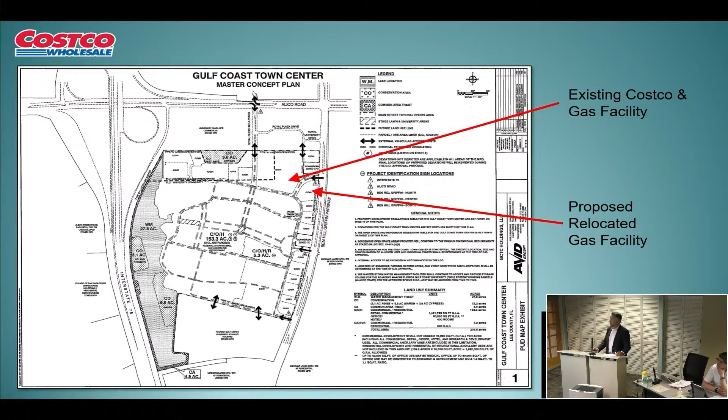This is the Gulf Coast Town Center site plan, and it shows where the existing gas facility is and the proposed relocated gas facility.

This is the PUD exhibit, so it shows in context with the out parcel redevelopment, the new staging of the vehicles and the canopy, the entry point that we talked about, and then the need for a separation distance from the intersection, as well as the separation distance from the Taco Bell parcel. But as you see, the interconnection points will remain into Taco Bell, and there will be dedicated circulation internally for the vehicles.

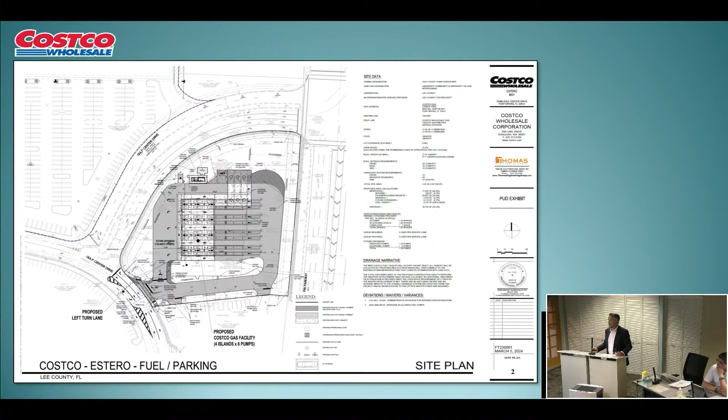The next slide shows a closer up image of that with the site data. This was all supplied, but I wanted to provide something zoomed in so we could see it if we need to go back to it for discussion purposes.

But you see the main entry point here. This is one of the deviations we need, which is a separation distance from the intersection and a separation distance from the Taco Bell parcel. But the two interconnection points will remain. They've already been programmed, and you see the circulation.

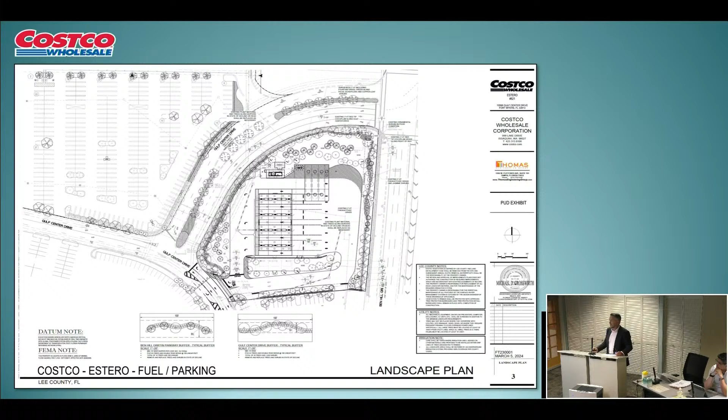This is our landscape plan. What we're doing is supplementing the existing landscaping that's around the perimeter that was installed with the development of Gulf Coast Town Center. It's very mature, very robust. We're going to be adding to that on the property in various areas throughout, where we've added landscaping per the landscape code and plan, and this has been deemed sufficient by staff.

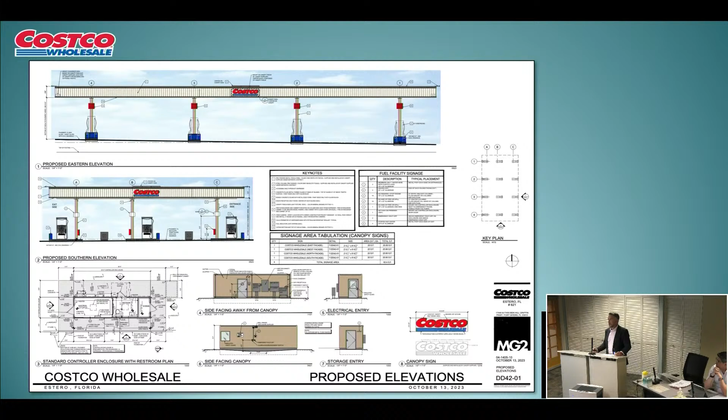And then there is the elevation imagery of the canopy itself. One thing to note about this facility again, I'll reiterate, there is no convenience store with this. There is no automobile service abilities for gas and oil and tire change. It is strictly a fueling facility, and it is tied to the hours of operation of the existing Costco wholesale store, so it won't operate as a satellite. It will remain as an ancillary use to the primary use, which is Costco wholesale.

And with that, thank you very much. Me and my team are available to answer any questions.

So can you go back to the site plan for a moment for the actual site? Yes. So the future expansion, because you're requesting 30 fueling stations. That's correct, fueling positions, which currently is 8 pumps with 16 fueling positions.

That's one of my questions, because the TIS mentioned that you've currently got 8 pumps, 16 fueling positions. You're changing to 15 pumps, 30 fueling positions, but the request is written as you're increasing from 8 to 30.

30 overall is the request. Yes, ma'am. And here it is in graphic form.

This is the 24 pumps that will be built immediately under the canopy, and then here is the addition of pumps in the future. We've already designed this to allow that expansion as needed per code, and it meets all circulation requirements. The immediate need is 24, but in the future we have the ability to apply for site and engineering plan approval as a future phase expansion per demand. So there's 24 now, and it'd be an additional 6 in the future, determined by demand.

Okay, so those would not be constructed, but you would have whatever infrastructure in place to accommodate that. There would be a grassed landscape island right here until there is a need for expansion into additional fueling. Thank you for that, because where future expansion was written, I thought they were going to be going that way, which would affect us. No, it's going to run the length of this canopy here and extend out.

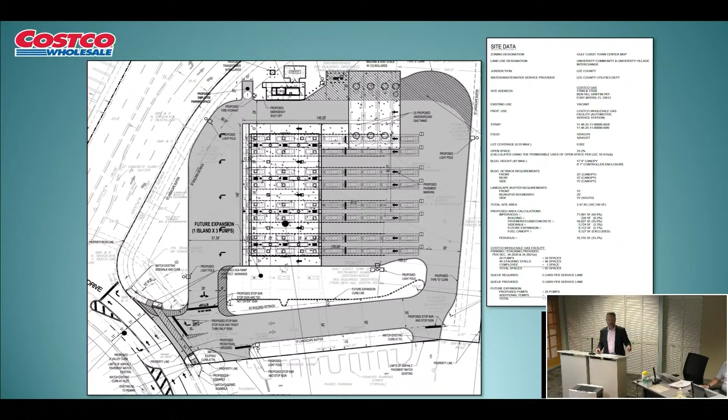That's a great point. We don't intend to operate both, but I will let John Alvarado with Costco speak. You can come up to the microphone. Hey, how are you? For the record, John Alvarado with Costco Wholesale.

So we've done this in different locations. Actually, the three of us worked on another one in Altamonte Springs. Normally what we do is operate the existing one until the other one is completely ready to function, and then we shut down one and open the other one. So there won't be an overlap of having two fuel facilities at the same time.

I want to clarify, it depends on the time of year. If, for example, we finish building it closer to the holidays, we're going to use the new one and close the other one, but we won't demolish it at that point because it's our busiest time of year. And then we don't want to put our employees through the stress of dealing with construction during the holidays.

But it will be completely blocked off, so no use. What would be otherwise the expected time between demolition of the old facility to ensure there's no issue? Also, people are going to be used to going to the old one. There's going to be some confusion, I would imagine, at some point while one's under construction, especially once it looks finished, and then the old one.

I want to be sure that whatever signage or whatever you're doing—if we need conditions here to ensure that's done, or if you need to demolish within a certain period—I don't know if that's been discussed.

Okay, that's more like the construction scheduling, and it depends. We have a blackout period, we call it, from November 1st to January 1st. So in that period of time, we try not to do any work on our properties.

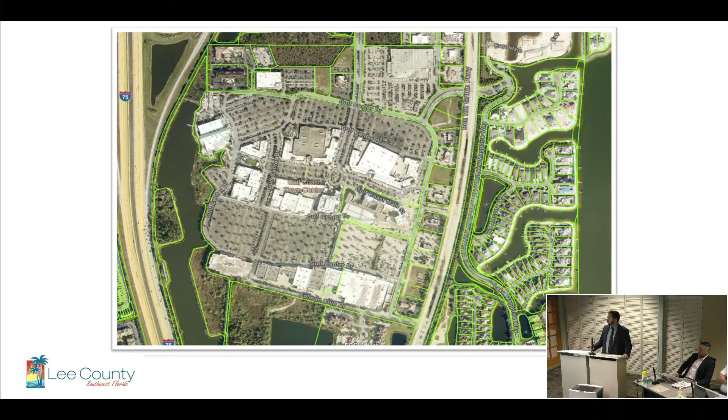Just to put a little more on the record, this is part of the Gulf Coast Town Center MPD. It's quite a significant plan development. Within Lee County, it is a DRI as well. In terms of its location, it's up here in the northeast corner, adjacent to the Costco, across the street from Gulf Center Drive.

The applicant did note that this is really just moving across the street, and I've already put on the record that what's happened is this was an ancillary use, but with its moving across the street and away from the subject property, it's no longer technically an ancillary use, even though its function will be that way. It is a standalone automotive service station. The distinction between that and a convenience food and beverage store, which is what we see most of today, is the lack of a retail component. I can't go buy chips and a soda at this location, I can only buy fuel. That's the big distinction between an automotive service station and a convenience food and beverage store, but that is the correct use classification. That's our opinion, yes.

I don't have it here, but just to talk about the site plan a little bit, there is an existing 25-foot buffer along the property line here, and I believe it's 15 along the north side. I'm not entirely sure of the existing condition of the plantings there today, but with the space that was available and the requirements of 34-1353, it's staff's opinion that the space is available for them to comply with those requirements at time of development order, and that's why we didn't jump in and try to provide additional conditioning on the landscaping plan.

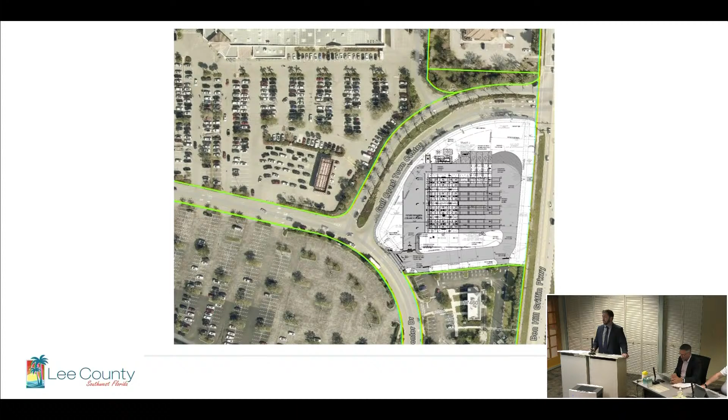This was originally rezoned back in 2000 with Z00024. The most recent governing resolution is Z2020-020 for the record. And there was an administrative approval in 2021 to address some changes with the multifamily tract interior to Gulf Coast Town Center.

Moving forward, I want to talk briefly on decision-making criteria. The applicant went through in their request statement and addressed the criteria as required by the Land Development Code for rezonings and for the plan development amendment criteria. We find that this is a relatively small piece of Gulf Coast Town Center, not a very significant change overall. It really is a relocation of an existing use, and it's our opinion that what the applicant put on the record about this being part of an existing members-only club, the Costco gas facility, means it wouldn't significantly change the amount of trips compared to something like a Wawa or a RaceTrac if constructed there.

This is in the university community future land use category, which has been established to augment Florida Gulf Coast University and provide cohesive development with it. There's a lot of word spaghetti with Florida Gulf Coast University and Gulf Coast Town Center, but we find that this is just working on a single out parcel and not significantly changing the already functioning Gulf Coast Town Center, and what they're doing does not run afoul of the goals, objectives, and policies of Goal 15.

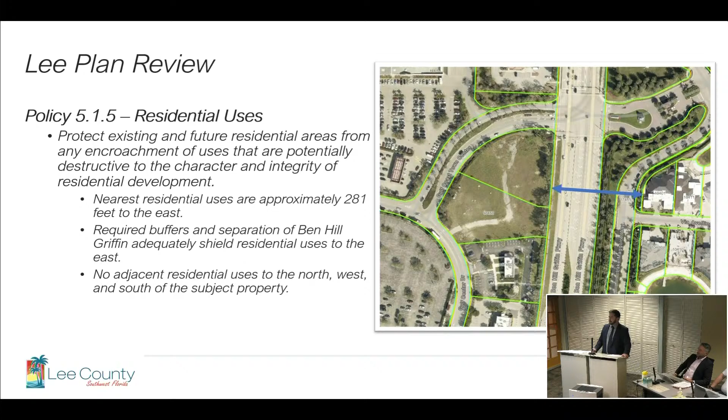Even though we aren't necessarily relying on their landscaping on their end, we do find with the separation and the existing landscaping on our end that there is a substantial separation and buffer today that would ensure minimal impacts from the facility. There are no adjacent residential uses to the north, west, and south. A little further south and west you run into the apartment complex. I'm not sure if that's open yet, but last time I was down there it was still under construction.

Staff reviewed the case through Goal 6, and those requirements will be reviewed again at time of development order approval. I did want to talk about that a little more. You asked about this one gas station being in effect at a time. Oftentimes when things are being replaced on a property, there's an ability for a development order to be stipulated where you get a CO for a property for a gas station, and then there's a stipulation that basically says within 90 days or within 6 months the other facility needs to be demolished. My suspicion is that's how that would play out at time of development order to ensure compliance with the requirements of the zoning resolution.

This isn't a mixed-use development area, but the planned development itself is a mixed-use planned development. Because this isn't really incorporating a true new use, there wasn't a lot of changes to the review for Goal 11, but we do find it meets the consistency of that goal as well.

There is an existing surface water management plan and approved DRI for this property. That may need to be reviewed at time of development order, but they will be required to be consistent with that and tie into the existing infrastructure for Gulf Coast Town Center.

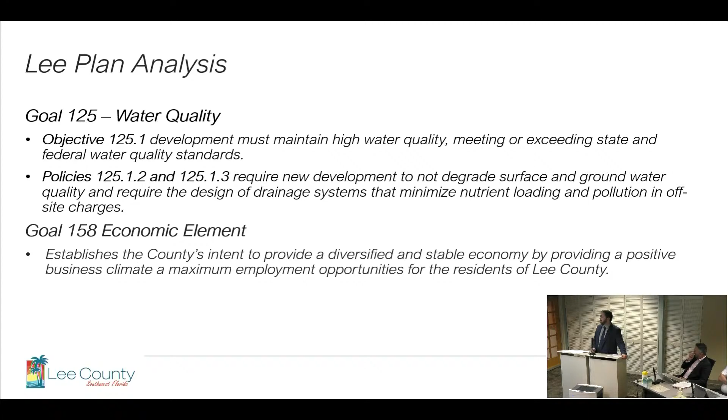I just wanted to put on the record about the deviation. Deviation 24, that's 72 feet versus I believe 93 feet in the staff report. We don't find that to be a significant change, and we're still recommending approval of that deviation.

With that, we're here for any questions you may have. We are recommending approval. I think I asked my questions fully as we went through, but we will come back after rebuttal, I'm sure, and address anything else we need to.

Thank you. Okay, so with that, we will open the public comment period. So the first card I have is for Neil Montgomery.

Good morning, Neil Montgomery for the record, Pavese Law Firm, and Mr. Morrow, our expert witness, is here with us. Just by way of background, I am familiar with both of these projects. I did the DRI for Gulf Coast Town Center, and I did the DRI for Miramar, and I've done most of the amendments to Gulf Coast Town Center.

With that, I would point out that Brad did not ask for a deviation from lighting. There is an existing deviation that allows 30-foot poles, and obviously Miramar is an existing residential community.

I do want to point something out. Having worked on most of the projects within the university community, there is a requirement in the Lee Plan that they're supposed to have it reviewed and commented on by the university. Originally the language said by the Board of Regents, but over time they got rid of that. So originally it was Charlie Reed, then Joe Shepard, then Steve McGarrah, and now it's Kitty Green. We've gone to meet with them on every change for the ones we've done. I don't know that I saw it in the record that they did that, and that is a requirement of the Lee Plan.

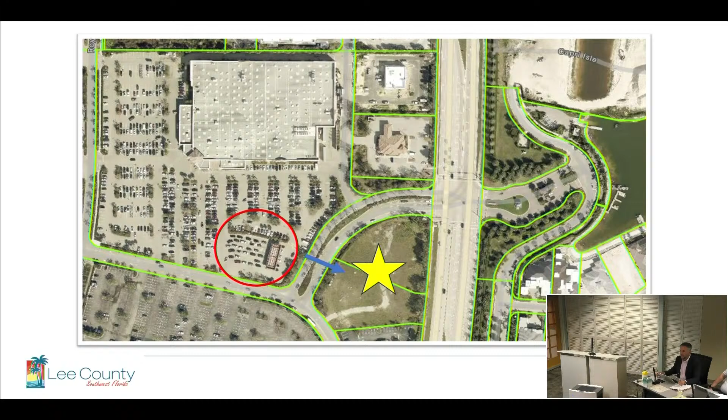Okay, so with that, we will conclude for today. I would like then for the record to be open at that time before July 8th, then the revised conditions that you might come up with, the letter from FGCU, just so I have that for the record to tie up that loose end, and the photometric plan. We don't typically look at that at zoning, but because that's been the central issue of discussion today, I should have that in the record as well. So those 3 items, and you'll get an order that says...